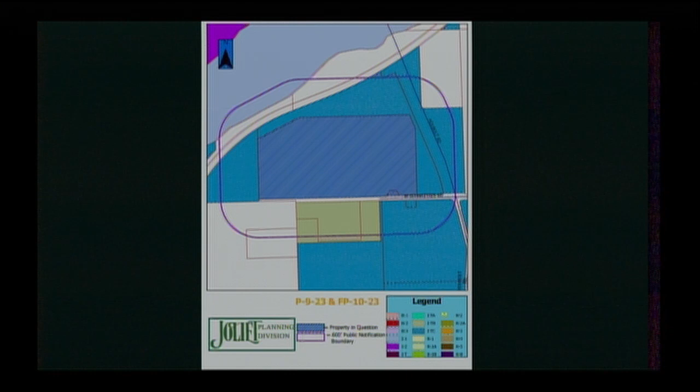Site history: the majority of the Centerpoint Intermodal Center at Joliet development was annexed, zoned IT and approved with an annexation agreement as part of Phase 1 in 2008. Phase 2, which included all of Centerpoint holdings at the time, was approved in March 2010. Subsequent phases have been recorded from March 2011 through June of 2021. The subject site comprises lots 19 and 20 of Centerpoint Intermodal Center at Joliet Phase 19 subdivision, which was approved and recorded in April 2018. The subdivision was also reclassified at that time from I-1 Light Industrial to ITC, Intermodal Terminal Industrial Park zoning.

A 977,150 square foot warehouse was recently constructed on the site and is not yet occupied. Schweitzer Road, adjacent to the site, is now fully constructed. Under special information, the petitioner seeks approval of preliminary and final plats for Phase 26 of the Centerpoint Intermodal Center at Joliet subdivision. Plats create 3 lots to separate the existing site components. Lot 22 contains a recently constructed warehouse development. This lot also includes Lot 19 of Phase 19, which was originally set aside for a public transportation drop-off and turnaround that is no longer needed.

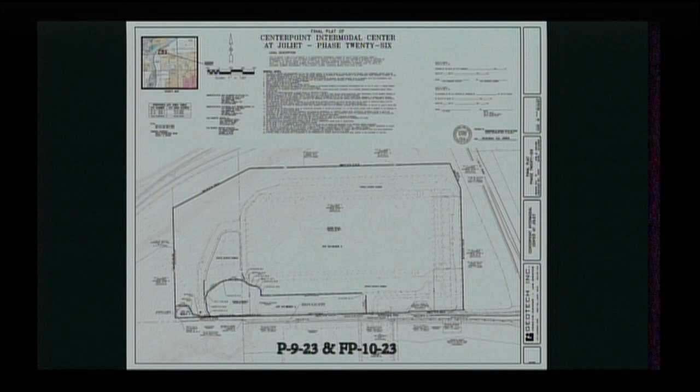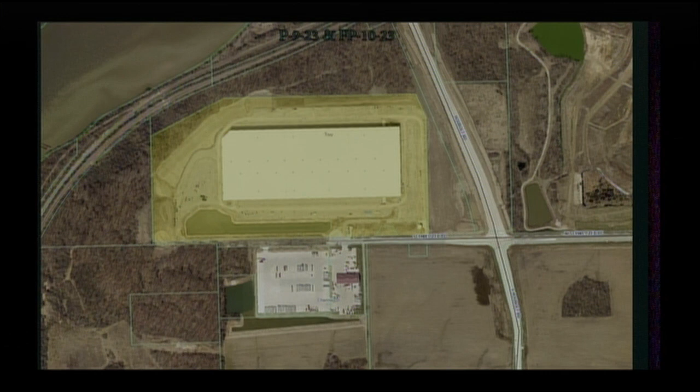Lot 23 contains a stormwater detention basin. This lot will be maintained by the Centerpoint Property Owners Association. Lot 24 contains the cul-de-sac that serves as the terminus of Schweitzer Road. There are future plans to vacate part of Schweitzer Road west of Hubbell Road to be a private road owned by the Property Owners Association. The subject property was recently developed as an industrial warehouse building in conformance with the IT zoning ordinance. Public improvements and other development requirements were addressed as part of that development. And that concludes our staff report.

Thank you, Jim. Do we have the petitioner on hand? You swear to tell the truth, the whole truth, nothing but the truth? I do. State your name, please. Chris Bacia. I'm here on behalf of Centerpoint. I've got Centerpoint's engineer, Chris Pappas, here, and Centerpoint representative, Carmen Baudolero. So I agree with the staff report. I think Jim kind of summarized why we're here.

This is kind of a cleanup of the lot that was created, and this plat will accommodate the future vacation of Schweitzer Road, and that's something that the city and Centerpoint have discussed west of Hubbell, and it's going to be a private road maintained by the property owners association. That's the ultimate goal, so this will facilitate that. It does eliminate that transportation drop-off and turnaround, no longer needed, and it creates a lot for the stormwater detention facility that's going to be conveyed to the property owners association.

There have been quite a few public improvements completed by Centerpoint in this location, and you'll see that the next case is property south and east of this, but quite a bit has been done out here. You know, Hubbell is now 4 lanes from Schweitzer to Centerpoint Way. Sewer and water utilities have been extended.

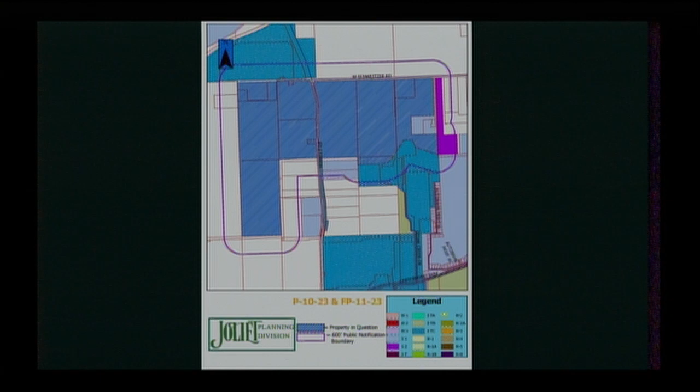To the east, industrial, again, pipeline, I1 light industrial, and I2 general industrial. To the west is undeveloped, county A1 agricultural, and County I-3 Intensive Industrial. Under site history, similar site history as the other one, so I'm going to skip that, but let me know if you want me to go back. This is the same site history for Centerpoint Park.

Under special information, the petitioner, Centerpoint Joliet Railroad Terminal LLC, seeks approval of preliminary and final plats for Phase 27 of the Centerpoint Intermodal Center at Joliet subdivision. This subdivision includes 10 lots, 5 of which could be developed in the future. Lots 29, 30, 31, and 33, which range in size from 22 to 176 acres, could all be developed and possibly subject to future re-subdivisions.

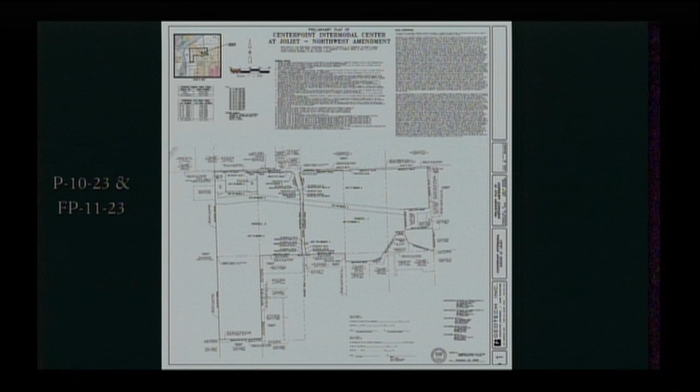Lot 25, which is 2 acres, could also be developed and is located next to the existing trucking facility at 2800 Schweitzer Road. Lots 28 and 32 contain pipeline easements and will be maintained by the Property Owners Association. Lot 34 contains a sanitary sewer lift station that will be owned and maintained by the City of Joliet. Lot 26, 2800 and 2898 Schweitzer Road, is developed and contains a trucking facility for Legacy Express Trucking. Lot 27 is a stormwater detention basin for lots 25 and 26 and will be maintained by the Property Owners Association.

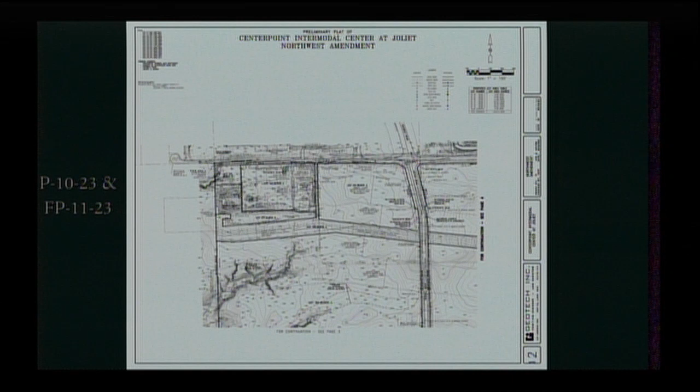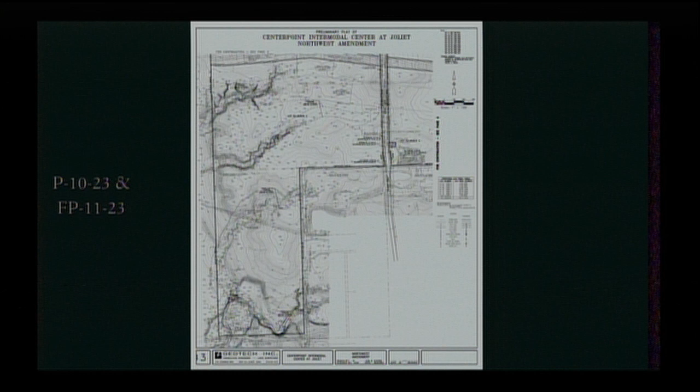Proposed development plans will need to comply with the existing IT zoning ordinance and the landscape ordinance. Sewer and water connection fees, sewer surcharge fees, and development impact fees will be required as per the previously approved annexation agreement. Landscaping requirements will include a 30-foot landscape area adjacent to Schweitzer Road and Hubbell Road.

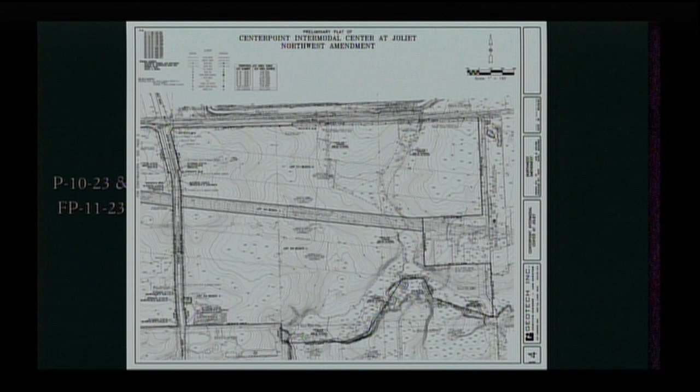All public improvements will be required per the subdivision regulations and the requirements of the Public Works and Public Utilities Departments. Humboldt Road and Schweitzer Road are fully constructed adjacent to this subdivision, and a traffic signal is installed and operational at the intersection. A portion of Schweitzer Road adjacent to the northwest corner of the site will be dedicated to the city. There are future plans to vacate part of Schweitzer Road west of Humboldt Road to be a private road owned by CenterPoint Property Owners Association, and that concludes our staff report.

Thank you, Jim. You have the petitioner on hand? You're still sworn in. Chris Spacia again. I agree with the staff report on this. This is another kind of cleanup. It's going to get this property ready for future development. Similar to the Phase 26 plat, this plat will allow for the future vacation of Schweitzer Road west of Humboldt to become a private road.

Separates out stormwater areas, pipeline easements, and those will be maintained by the Property Owners Association. And as the staff report points out, a note that was added to the plat indicates that the development will comply with the IT zoning district setback and landscaping requirements. So with that, I would entertain questions. The Property Owners Association is you guys, right? You guys are basically the association. It's a separate legal entity, but yeah. Oh, okay. Any questions from any of the commissioners?

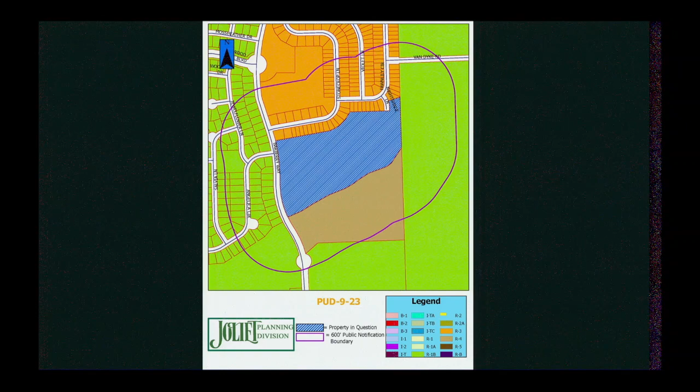Next agenda item is PUD-9-23, preliminary plan unit development of Lakewood Prairie Subdivision, Unit 4. This is east of Barberry Way and south of Stone Crop Lane. Under general information, the applicant is CalAtlantic Group LLC. Status of the applicant is contract purchaser. The requested action is approval of a preliminary plan unit development, Lakewood Prairie Subdivision Unit 4. Purpose is to allow future development of 180 townhomes. Again, the location is east of Barberry Way and south of Stone Crop Lane. Size is 22.187 acres net and approximately 39 acres in total with the detention area. Existing land use is vacant, undeveloped land.

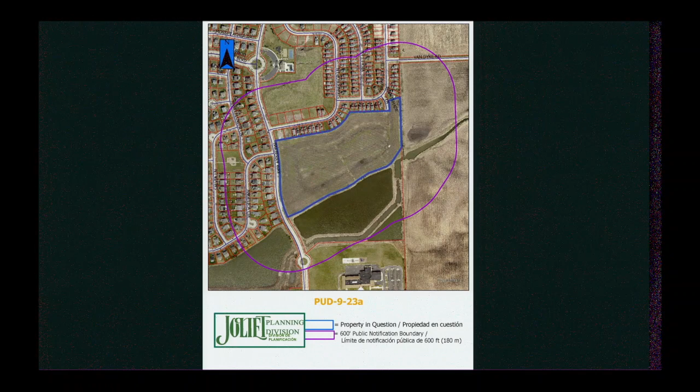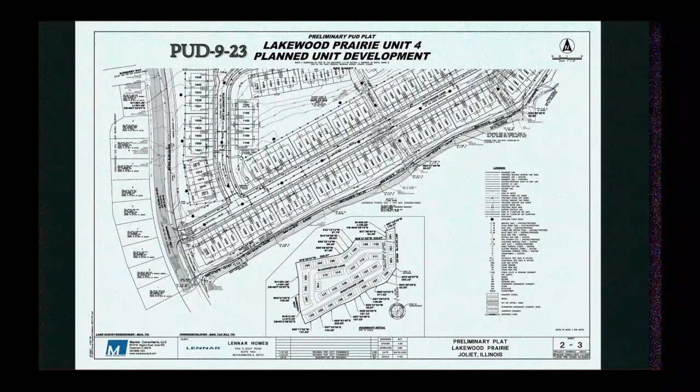Surrounding land use and zoning to the north is two-family residential, R3. To the south is the detention pond, R4. East is agricultural undeveloped, R1B. And to the west is single-family residential, R1B. Under site history, the subject property was annexed into the city and zoned to its current zoning designation of R4, low-density multifamily residential zoning in December of 2003. Property was annexed and zoned with the greater Lakewood Prairie subdivision with intent to be developed with townhomes, thereby necessitating the existing R4 zoning designation. Development of the townhome portion was delayed due to unfavorable market conditions.

At this time, the subject petitioner, CalAtlantic Group LLC, wishes to develop 180 townhomes on the subject property as originally intended. Special information, the petitioner is requesting approval of a preliminary plan unit development plat of Lakewood Prairie Subdivision Unit 4. The proposed subdivision would contain 180 dwelling units within 33 townhome buildings. Townhome units would range between 1,550 and 1,800 square feet and would feature 2 to 3 bathrooms and 2 to 4 bedrooms per unit. Initial market pricing for townhomes would be between $350,000 and $380,000 per dwelling unit. Draft elevations and floor plans of the proposed townhome models have been included in the staff report packet.

Section 47-15A.5 of the city's zoning ordinance allows for use exceptions within a PUD, provided that the Plan Commission finds the following: 1, that the uses permitted by such exception are necessary or desirable and are appropriate with respect to the primary purpose of the development; 2, that the uses permitted by such exception are not of such a nature or so located as to exercise a detrimental influence on the surrounding neighborhood; and 3, that the uses permitted by such exception constitute less than 5% of the ground area of the

planned unit development. Petitioner is requesting a use exception to reduce the amount of masonry from 100% along gross front elevations and 50% along gross side and rear elevations to the amounts shown within the submitted draft elevations. The previously approved annexation agreement for the subject property requires 50% of all gross front elevations and 25% of all gross side and rear elevations to be comprised of brick or stone. However, the agreement is set to expire in December of this year, 2023.

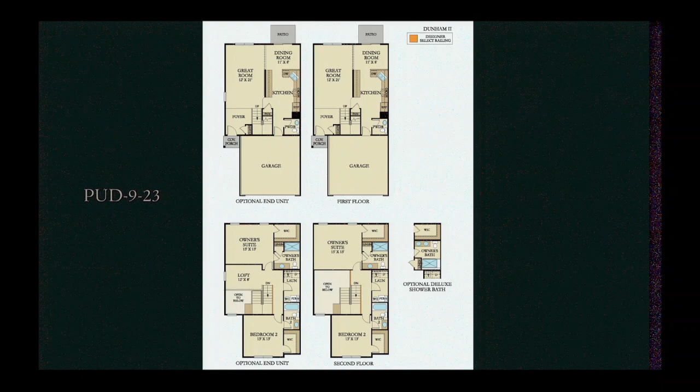Section 47-17.30 of the city's zoning ordinance describes anti-monotony requirements for residential construction. The ordinance states that no two multifamily buildings of substantially similar front elevation or facade shall be constructed or located adjacent to one another, nor shall there be constructed or located more than 25% of buildings of substantially similar front elevations or facade in any block.

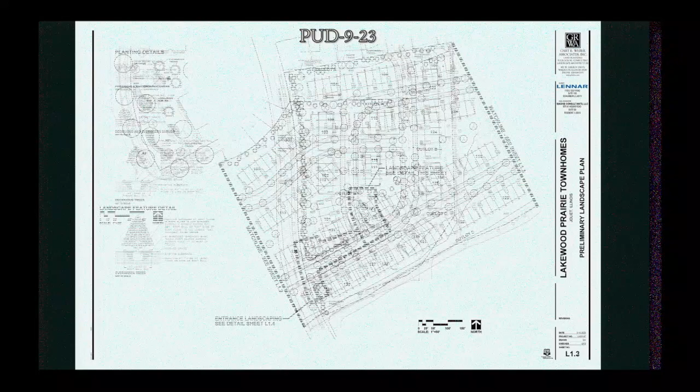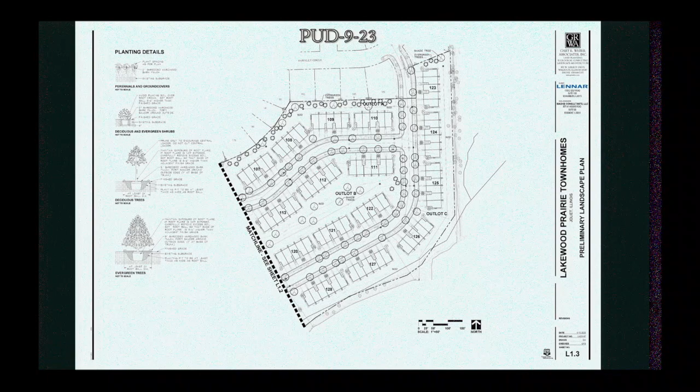However, section 47-17.30 D allows for modifications to the city's anti-monotony regulations should the mayor and city council, with the advice of the Plan Commission, find that the similarity of architectural form and style among buildings is integral to the character of a unified development plan in which the high quality of building materials, building plans, or site plan overcome the presumed deficiencies of similarity. Staff will continue to work with the petitioner on submitted designs and placements of potential townhome buildings within the site, but generally believes that the style and architectural form of the buildings within the submitted elevations will match or exceed the design quality of comparable townhome developments throughout the city's far west side.

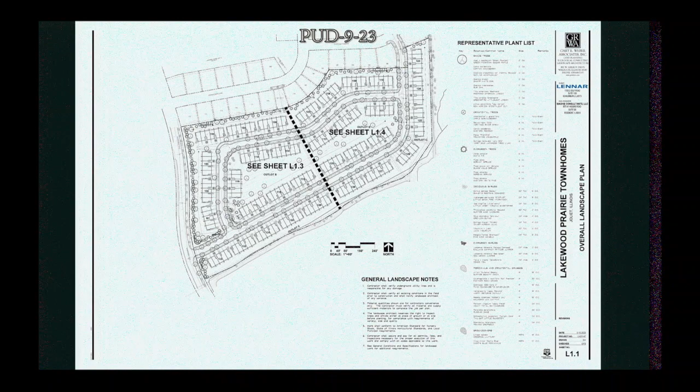The subdivision would feature 2 new streets. Nightshade Lane, which currently terminates just south of Stonecrop Lane, would be extended to the south and west to Barberry Way. Blazing Star Lane would run between Nightshade Lane to the southwest portion of the PUD before reconnecting with Nightshade Lane in the northeast portion of the PUD. An existing stormwater detention pond to the south of the subject property has already been sized for the proposed scope of development of 180 townhomes on the subject property.

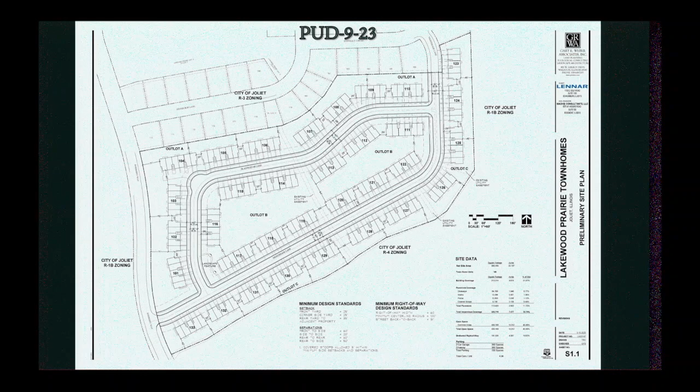The proposed PUD would have an approximate density of 4.56 dwelling units per acre when including the property's total site area. A 3.1 acre shared open space outlot can be found in the middle of the PUD between Blazing Star Lane and Nightshade Lane. Additional open space would be provided along the eastern boundary of Barberry Way. A 10-foot wide bike path was built within this area in 2008 to provide a recreational amenity for the greater Lakewood Prairie development. Petitioner is hoping to negotiate inclusion of the subject PUD into the existing Lakewood Prairie Homeowners Association, but is willing to form its own HOA in the event it cannot gain approval from the neighboring HOA.

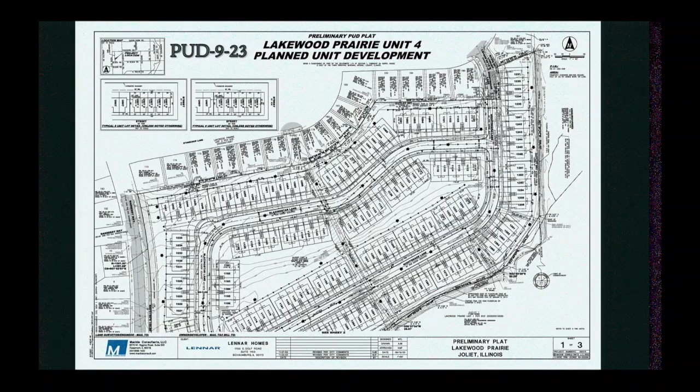The site is subject to Minooka Elementary and High School District contributions, the school facilities fee, Joliet sewer and water connection fees, and the economic development impact fee. And that concludes our staff report. Thank you, Jim. Do we have a petitioner on hand?

Good afternoon, Commissioners. Do you swear to tell the truth, the whole truth, and nothing but the truth? Yes, I do. State your name, please, and speak into the mic. Vincent Rosanova. I do have a PowerPoint slideshow that I'd just like to share with you. Ray's gonna help get me loaded.

So once again, for the record, I'm Vince Rosanova with the law firm of Rosanova and Whitaker, here today on behalf of the petitioner, which is Lennar Corporation. Also present and available for any questions today are Todd Clevin, Lennar's Director of Land Acquisition, as well as our civil engineer, Madeline Larman with Mackie Consultants. We certainly appreciate Jim's detailed and thorough presentation, so I'm just going to hit upon a few key aspects, and then our team will be available for any questions.

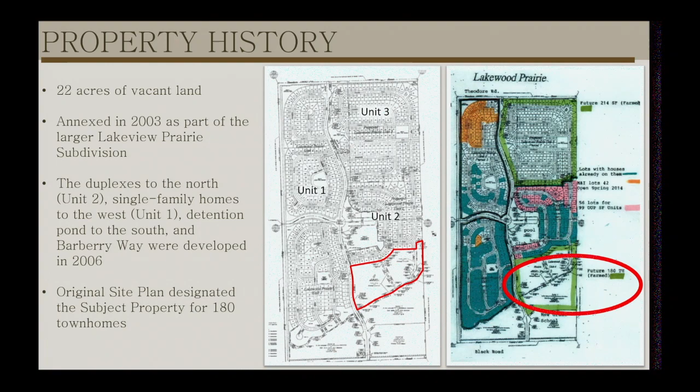In that regard, back in 2003, this property was actually zoned R4 to accommodate those future townhomes, and furthermore, all utilities were provided, stubbed into the site, as well as the access points off of Nightshade and Barberry. The only reason why these townhomes were not built to date is due to the economic downturn we saw in 2008, 9, and 10, which ultimately led to this property sitting vacant, underperforming, and contributing essentially nothing to the overall vibrancy of Lakewood Prairie.

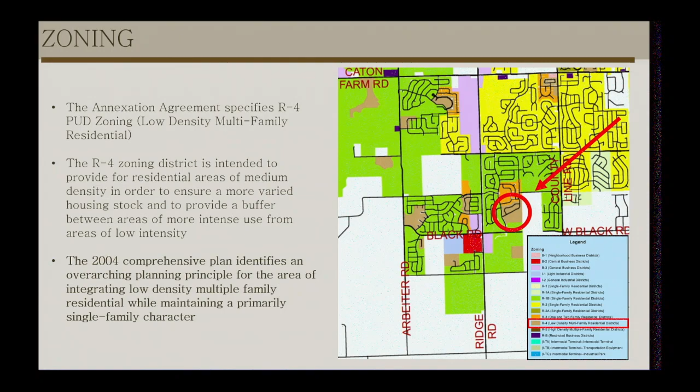Not only is the proposal in front of you this evening consistent with the underlying zoning, the PUD, the annexation agreement, but it's also consistent with the city's comprehensive plan, which designates this property for townhomes. Accordingly, the site plan tonight is directly in conformance with all underlying documents as well as the comprehensive plan.

As Jim mentioned in his report, we anticipate that the average sale prices will range between $350,000 to $380,000, which is significant sale prices and very good from a per square footage or comp perspective. So that will actually drive up the per square foot price within the community. If you look at the historic sales over the last 12 to 24 months, they've sold generally in the range of about $170 per square foot, where it's anticipated that these townhomes will sell in the ballpark of $210 per square foot, which is very good for property values.

I think it's also important to point out that traditionally a townhome doesn't compete with single-family homes. Typically, a townhome is very appealing to young professionals, empty nesters, active adults, those folks looking for low-maintenance housing opportunities, with the homeowners association being responsible for exterior maintenance, snow removal, as well as lawn care.

So moving into the site plan, just a few key elements I want to discuss. The first thing is the significant buffer that we've instituted along Barberry Way. You can see not only is this landscaped, but this also includes a significant berm as well as an enhanced setback, double of what the city code requires. This provides for a very nice aesthetic as you travel up and down Barberry Way. You can also see that we're only providing one access drive into the community. We're not front-loading townhomes with driveways off of Barberry. This certainly also enhances the view and enhances circulation.

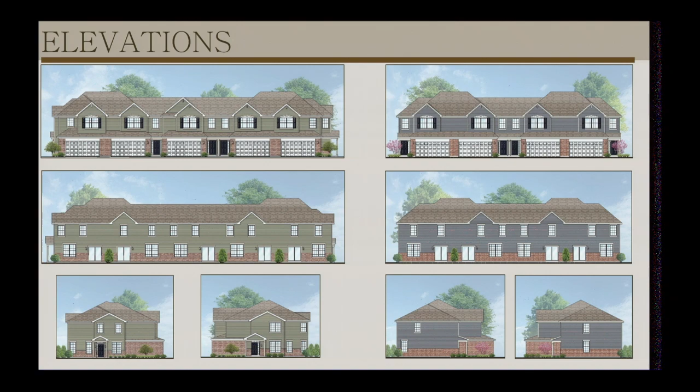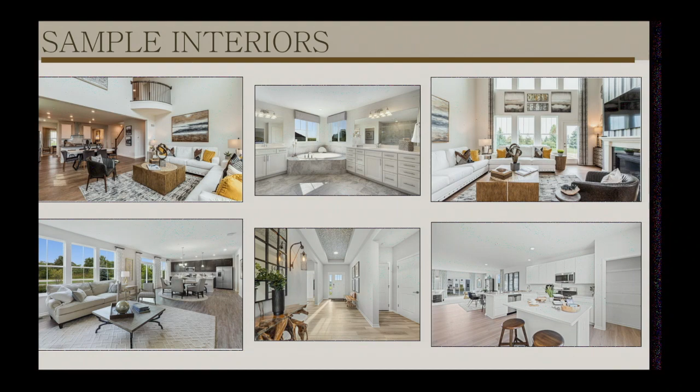There'll be architectural shingles, which will add interest, as well as varying roof peaks and pitches, which will also add additional interest. And then you can see the architectural details, covered entries, decorative garage doors with windows, as well as decorative cornices. So these architectural enhancements carry along all 4 sides, which we think will be very nice in the community. This next slide just depicts the quality which Lennar incorporates into the interior of their homes, which is evident with these slides as well.

And that's really the executive summary. We certainly appreciate your time and consideration this evening. I will say we've taken this very slow and methodically over the last 9 months. We've worked closely with city staff to make sure all their points of view were taken into account with the site plan and also all the original PUD vision for this community.

We've also reached out to the board of directors of the Lakewood Prairie Homeowners Association, had some productive meetings. We also had a meeting where we invited every single resident of the community back in August, September to come to the clubhouse, review, provide feedback on the site plan and the architecture. I would characterize that as very productive, very positive. The main question that we received was relating to price points, and certainly at the $350,000 to $380,000 price point, that is significant and consistent with the value and the price points that we see in the community. So thank you, and we're available for questions.

Thank you. Do we have questions from any of the board members? Yeah. Go ahead. I knew you had something. I had some.

Sir, one thing, it says over here, it's the Cal Atlantic Group. Now, who's the Cal Atlantic Group? You said you're with Lennar? Yeah, Cal Atlantic Group, commonly known as Lennar Corporation. Oh, yeah, same outfit. Okay. Correct. Okay, another thing too. They're gonna have 180 dwellings and 33 townhome buildings, right? Correct. Okay, are these all gonna be, I'm just using that word, cookie cutter floor plans? Or can they alternate the floor plans according to what their needs are?

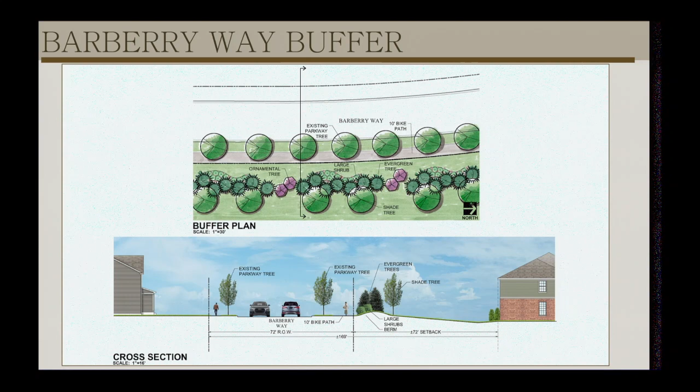Oh, so along Barberry, we have a 72-foot setback. Between the back of one of our homes to the right-of-way line along Barberry, that's 72 feet. I believe the rear yard setback code requires 25, Jim could correct me if I'm wrong. We have 72 feet there to provide that extensive separation, not to mention the berm and the landscaping. Is that where the park will go? No, there's no park.

There's no park, but here in the center of the site, as Jim mentioned in his staff report, is 3.1 acres of open space. So that would all be just grass then? It's all open, grass and landscaping. All grass and shrubs? Right. Was there ever an intention to put a walk path or a park in this development? So what's really nice is there will be sidewalks on both sides of the street, consistent with the city's subdivision control ordinance.

Then there's already an extensive path system along Barberry, which is already built, which is already an 8 to 10 foot wide path, which takes you throughout the community as well as up to the clubhouse, up to the future public parks. So that network has already been provided for. So our sidewalks connect up to the path network.

Okay. Do you have an estimate how much the fees will be for the association, for the basic, for yours? So if the master association would let us join, what I was quoted was $50 a month, which would be something that would certainly be feasible for us. And then what about for yours? For ours, typically, they would range between $200 and $300 a month. After paying $350,000 for the building?

Yeah, right. Okay. And no brick. But, well, you get brick. You get reduced brick, right? You're just not 100% brick, but you get brick, yeah. It's hard to find 100% brick anywhere in Joliet these days. Let's go to the old Joliet. Yeah, okay. Any other questions?

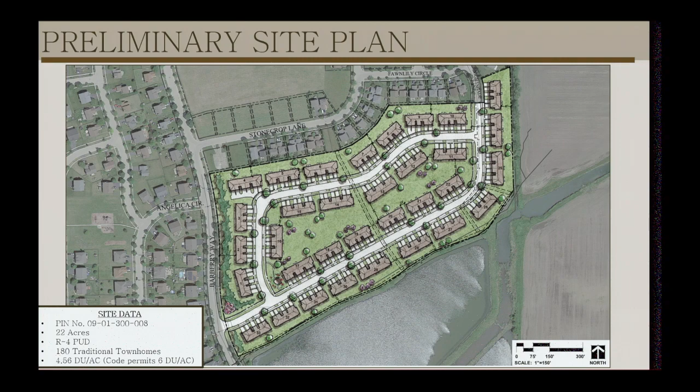There's a driveway that goes all the way out to County Line Road, okay? If I go the other way, down by the Jones School, it's blocked off because of the school, so there's no access unless you go out Black Road toward Ridge Road. So, for the development that these two gentlemen are talking about, I can understand their concerns, but I've been living here a long time, and I just want them to know my concerns.

Thank you, sir. Yeah, no, I have to agree with you, sir, it's a hard way to get to the subdivision. Because I took a ride out there, because I had no idea where it was at. And I'll tell you what, I almost had to pack a lunch to get out there. It's a long haul from Joliet here. I agree with you on that. It is kind of a hard area to get to.

And I really want the commission to know that that area was designed for recreation. That's what I was told when I first had my house constructed there. I heard this gentleman say that it was originally going to be for townhomes. I'm just curious, sir, who told you it was for recreation, though? That was when I went to have my house, that was Lakewood Prairie. The association told you that? Yes, that was back in '07.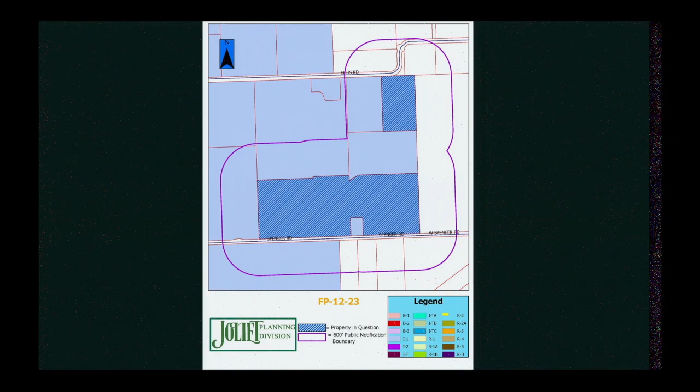Surrounding zoning to the north is warehouse I-1. To the south is undeveloped farmland I-1 and County A-1. To the east is undeveloped farmland I-1, County A-1. To the west is warehouse undeveloped I-1. The property was annexed and zoned I-1 light industrial in April of 2005. It is part of the preliminary plan for the Cherry Hill Business Park West Unit 6 subdivision, originally platted to include four lots for future light industrial use with 2 outlots for stormwater detention. A recording plat for Phase 1, which recorded Lot 1 to the south of Ellis Road, and Outlot A for stormwater detention and compensatory storage, was approved in September of 2021.

Under special information, the petitioner wishes to final plat and also record at City Council the remaining lots from the previously approved preliminary plat of Unit 6 for future development of a cold storage facility on Lot 3. Petitioner has simultaneously submitted for approval of a recording plat, and this will be sent to the City Council for consideration in December if all goes well.

The subject property received a variation from the City Zoning Board of Appeals in January of 2023 to allow double deep trailer parking that is shown on the proposed site plan for Lot 3. The total subject area is approximately 71 acres in size. Lot 3 is located to the north of Spencer Road within the southern portion of the Unit 6 site. Lot 3 would be approximately 23.6 acres in size and contain a 358,759 square foot cold storage building. The site would eventually feature 103 truck trailer stalls and 118 car parking spaces.

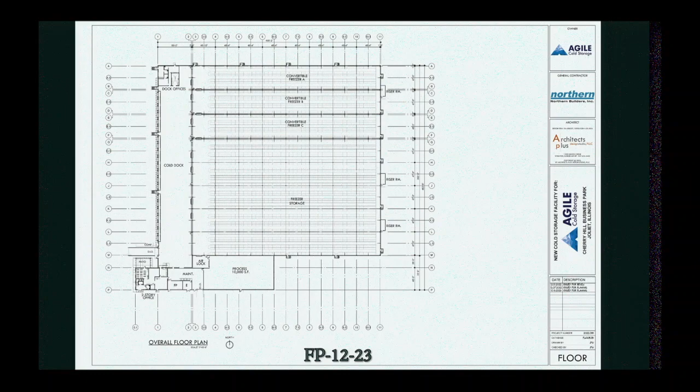Lots 2 through 4 are buildable lots that range in size from 11.3 acres to 24.1 acres. A 30-foot wide landscape buffer would be located along the north side of Spencer Road frontage. A 40-foot wide setback, which would include a 20-foot wide public utility landscape easement, would separate any future development between Lot 2 and Ellis Road. Each landscape buffer area will contain berming and installation of landscaping per section 47-15E.5 of the city zoning ordinance.

Each future lot would be required to connect to city water and sanitary sewer upon future development. Water and sewer connection fees and development impact fees will be required. Future development must comply with all requirements pursuant to the city zoning ordinance, non-residential design standards, landscaping, and screening regulations, and unified tree ordinance. And that concludes our staff report.

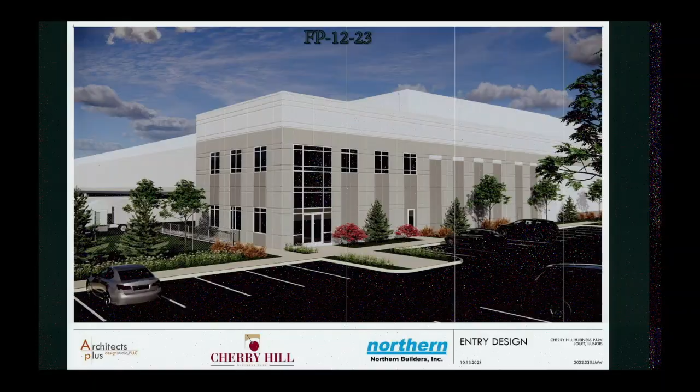Thank you, Jim. Do we have the petitioner on hand for this? You swear to tell the truth, the whole truth, nothing but the truth? I do. State your name, please. Ken Ninehouse with Northern Builders. You have anything you wish to add to all this?

I think Jim did an excellent job explaining our property that we own and the project that we have been working on for over a year. It's our intention to finish the subdivision of this roughly 100 acres to carve out what was known as Lot 19. The numbers are a little different. I think you folks have it as Lot 4, and the adjacent lot to the west, so those are buildable. It is our intention to move forward with this project to permitting as soon as we're done with the Plan Commission and City Council process.

We are doing Spencer Road at this time, turning that into 3 lanes. So we will be bringing the infrastructure to this property with the next phase, which is new sewer and water. And we are working with ComEd and NICOR right now to bring in the rest of the infrastructure. Okay. Any questions from any of the commissioners?

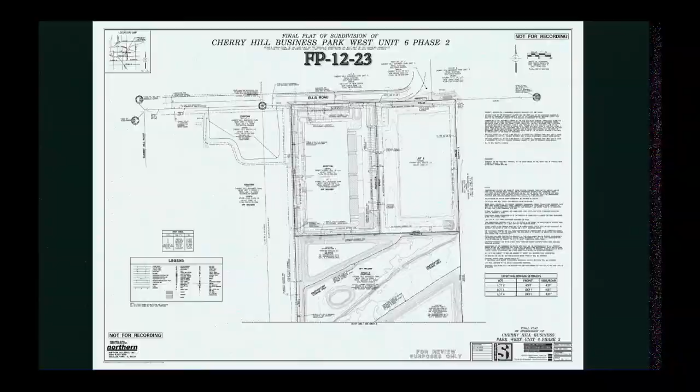Obviously, we've been doing this since 2005, and the sites range from 11 to this one's just under 24 acres. The site adjacent to the west is smaller. Jim, I'm not sure the size. I'm going to say it's maybe 15 to 18. Let's see, we had total subject area 71 acres, Lot 3. The one at Ellis, I believe, is 11. 23 acres, yeah. Lots 2 through 4 are buildable lots that range from 11.3 acres to 24 acres. And this being the 24-acre site for the Agile cold storage project.

Okay, so on Lot 3, that's the 23.6 acres, that's gonna hold a 358,700 cold storage site? That is correct, in 2 phases. Phase 1 is approximately 206,000, and where you see the green area in the back, that's slated for phase 2, which would be roughly another 150,000 square feet. Okay, what type of product is the cold storage gonna hold? Food, yes, for major suppliers like Kraft and other national brands. So like frozen meat, stuff like that?

Frozen meat, probably frozen dinners and, okay, probably everything we eat. Okay. Another thing I have, what type of refrigeration are you gonna use? Freon-based. Freon? Yes. Okay, so do you have any chilling towers, a water chiller tower? No, there won't be any tower. These are very unique systems.

The cold storage business is changing. Traditionally, you've probably seen in the past where they build just a refrigerated building that would be at 35 degrees for refrigerated products, or you would have a frozen facility for frozen products. So very unique companies that they work with. Actually, they're out of Georgia, that build systems that are completely convertible, where they can be operated at 35 degrees for the needs today, and they can be changed tomorrow or next year to operate at -10. So we can go back and forth.

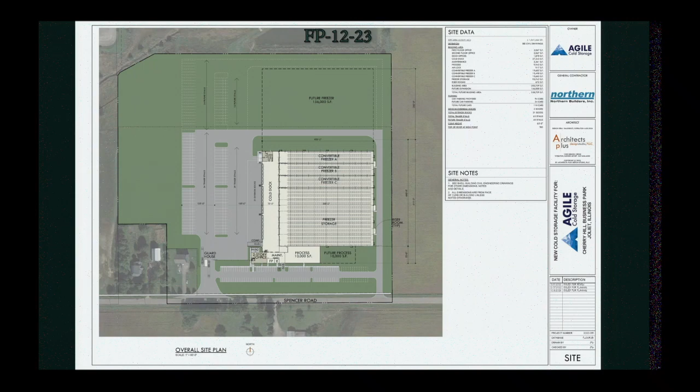Okay, the only problem I had, I took a ride out there, and Spencer Road right now, there used to be a 10-ton limit. That's correct. Between Briggs Street to Gauger, but now there's no 10-ton limit at all. There won't be. We are spending over $10 million to improve that and put in brand-new 3 lanes in all of Joliet from Cherry Hill Road to the eastern limits, which end on this site. It's New Lenox beyond that. So we'll be rebuilding that pavement section, but that's all we can really do with it because that is just under a county at this time. Okay. It is not annexed.

And I saw from Cherry Hill Road to a farmhouse, I believe, not the sewer, but the water main was put in. Yes. But it didn't continue to Spencer Road to Gauger. It does not. The inevitable plan is for this to loop back and make a connection to the water source at Ellis so that there is a complete loop and it does not dead end. That is in our engineering plans that we've submitted and worked with Jim's team and engineering on.

Okay. Another question I have for you. I took a ride out there on Cherry Hill Road, okay? I was at a couple houses there, and I backed out, and there is one opening on Cherry Hill, almost in the center of Spencer Road and Ellis Road. A semi-truck came out of there. Are they gonna use that for exit or entrance? No, that's completely separate. This will only enter and exit off of Spencer Road for this particular building, for the Agile Cold Storage Project. The lot adjacent to the west would only have access to Spencer, and the other lot that's referenced in this subdivision is on Ellis, but that is almost directly north, so that's not anywhere near Cherry Hill.

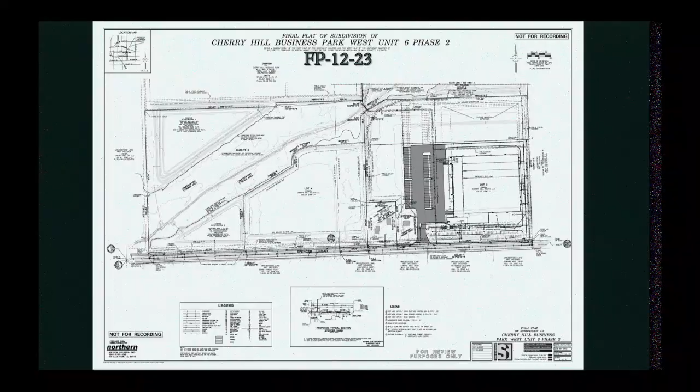Did you say you're rebuilding one of the roads or something? We are, Spencer Road. So what do you think the weight limit is on that one? That is for 80,000 pounds, whatever the standard trailers are, built to Joliet standards for trucks. Yep. We're also improving the intersection at Gauger and Spencer so that those trucks can make the turn. Right now, the radius is not sufficient. That's a lot. Yeah, so it's quite a project. So we're bringing the infrastructure in so we can build some buildings. Yep. Any other questions?

Mr. Chairman? Go ahead. Just a comment. Jim or whoever, the disclosure form hasn't been filled out, at least what we're looking at. Yes, it was. I'm not sure what's being referenced. The City of Joliet ownership disclosure form is empty on what I'm showing. Oh, my paper copy is filled out, so maybe it's missent. If you wanted it, we could send it to you. That's okay. They left ours blank, that's all. Okay.

Anything else? There was one lady that I think she wanted to. We haven't got that far yet. Are there any citizens that wish to speak for or against this at all? Seeing none. You do? Come up, ma'am.

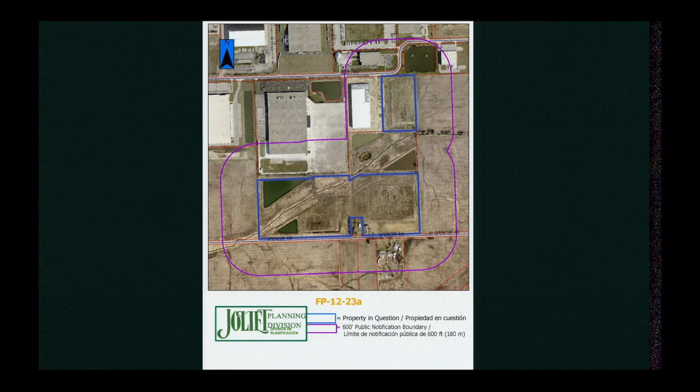No one has approached us. We had always assumed, you know, we're sitting in the middle of this place, that they're not gonna want us sitting in the middle of this industrial park. But no one has talked to us at all, or approached us about what they're doing, what they wanna do, what our intentions are.

We've lived there 53 years. Love the place, it was wonderful country when we first moved out there. But now you're talking all these big semis coming down the road that we're gonna have to put up with, the noise.

And I saw today, someone was on the lots east of us, Cherry Hill, which I know Northern Builders owns, and they looked like they were testing the ground. I assume maybe water, how the water drains or whatever. I don't know what they were doing, but somebody was out there working. So in my mind, they're already thinking about east of us, putting up something.

So there we will be, with these huge industrial buildings next to us, surrounded, with the noise and the traffic. Our intention always was to live there until we died, but who knows when that's gonna be. But anyway, I'm just concerned. I'm concerned with the water.

Now, if I understood Mr. Newhausen right, they're not going to be doing wells where they're gonna be drilling into the ground, because I had a relative that lived on Gougar, and when Lincoln went in, it drained her well. She had to go down 400 feet and put a new well in at her own cost. Our well is very shallow. We only have a 60-foot well. So I'm concerned about that. Is there gonna be any kind of water interference with this building?